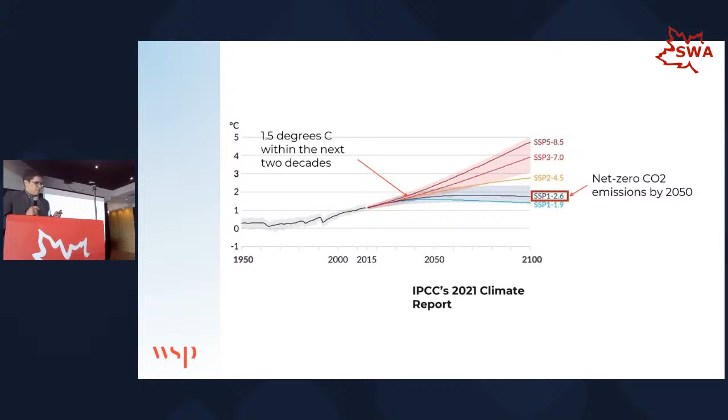So those are global average temperatures. Canada happens to be the country that will experience the most amount of temperature increase in the world. We've already seen a 1.7 degree increase since 1950, and as you get further north, the temperature increase will be even more severe.

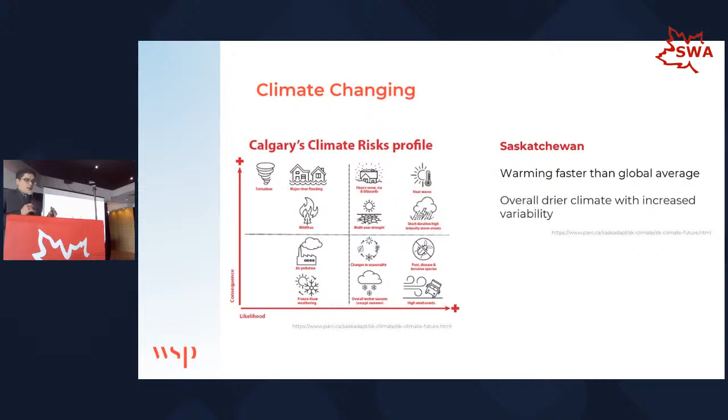So what that means for our buildings is the risks for extreme weather events are increasing. In Calgary, they refer to it as climate change hazards, including more intense storms, risks for flooding, and extended heat waves with higher temperatures. In Saskatchewan, we're expecting drier climates and more variability. This is happening all over the country. In Toronto it's a similar story: the number of days where temperature will be above 30 degrees is expected to triple by the 2040s, with longer and more frequent heat waves and more intense storms.

So what can we do about it? It's not all just doom and gloom. There's a big opportunity for us to really change the course. For us working in the building industry, we have a big opportunity here because over a quarter of the carbon emissions in Canada come from buildings. In the GTA, buildings are actually the largest source of carbon emissions because of the energy it takes to operate them and the carbon involved in their construction.

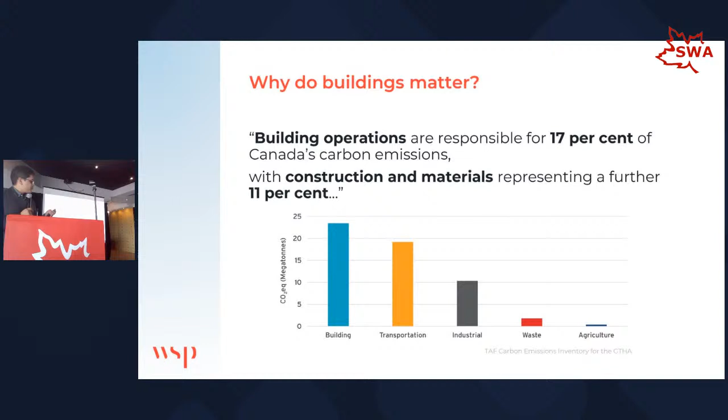So now let's talk about how our building codes and legislation are trying to address the issue.

So for new developments, it's fairly straightforward, right? Energy codes are becoming more and more stringent, demanding buildings that are more airtight, better insulated, and with mechanical systems that are powered by electricity instead of burning fossil fuels. As you know, in Toronto, we have the Toronto Green Standard that has different tiers requiring better energy efficiency as you go from tier 1 to tier 4. And the goal is that by 2030, we are building buildings that are net zero ready.

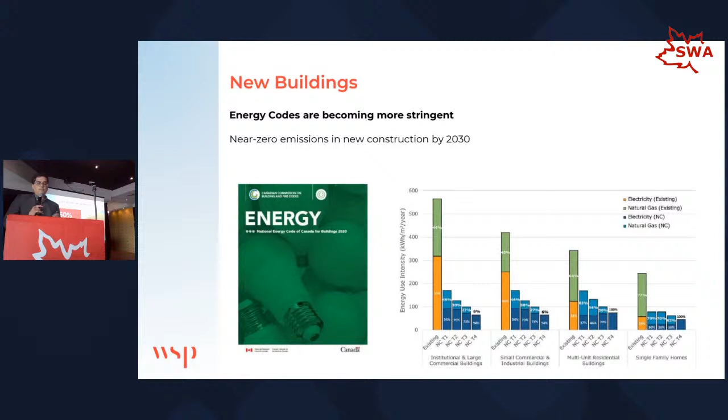But the problem is we can't just focus on new construction, because most of the buildings that will be around in 2050 have already been built. And many of them without any energy requirements at all. So that means that even starting today, even if every new development is built to net zero standards, we still won't be able to reach our carbon reduction goals. We really need to focus on improving our existing building stock.

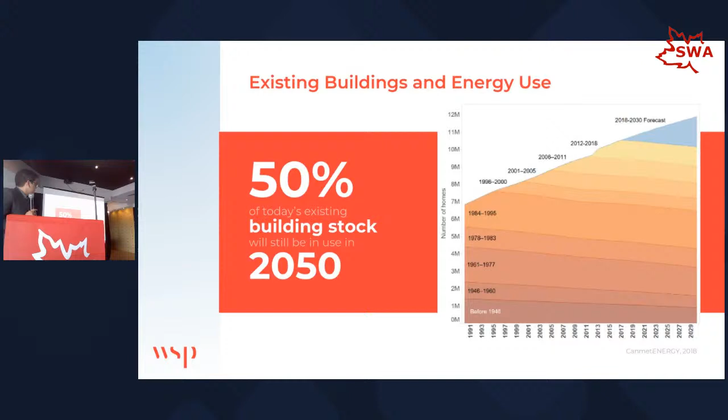So the federal government has recognized this and has committed to some key measures: setting a price on carbon that will increase over time, updating the National Energy Code to net zero standards to be in place by 2030, and creating an existing building model code that will include emission targets. I'll get back to this in a minute.

But the government realizes that this will require a massive amount of investment into our buildings. And so they've developed different funding opportunities for these deep energy retrofit projects.

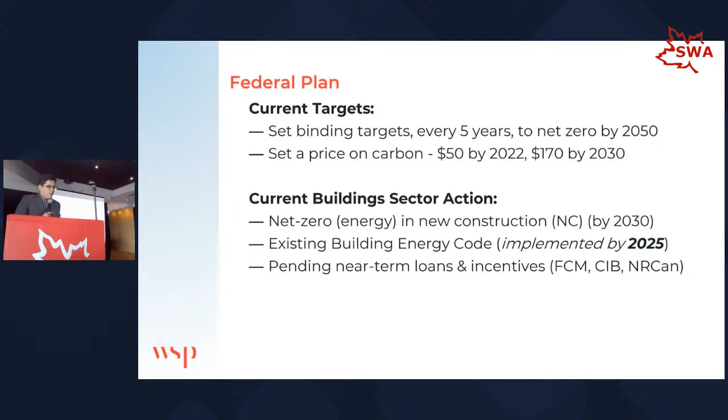In Toronto last year, the city committed to energy policies for existing buildings as well, requiring energy reporting and benchmarking our current building stock, requiring audits and recommissioning of our existing mechanical systems, and also establishing mandatory emission targets by 2025 for existing buildings.

So this is coming, and we need to start thinking about how we will retrofit all these existing buildings that are very inefficient.

This is in line with other municipalities across North America. In 2019, New York City passed Local Law 97 to start limiting carbon emissions from existing buildings. And in Vancouver, WSP has been helping the municipal government determine limits on greenhouse gas emissions for existing buildings that will be implemented in 2030. This, of course, will create a massive retrofit market and a great opportunity for anyone looking to improve the efficiency of our existing buildings.

So we have seen why changes are needed and what is being done at the policy and building code level. Now let's look at what actually needs to be done at the building level and what kind of projects we can look forward to.

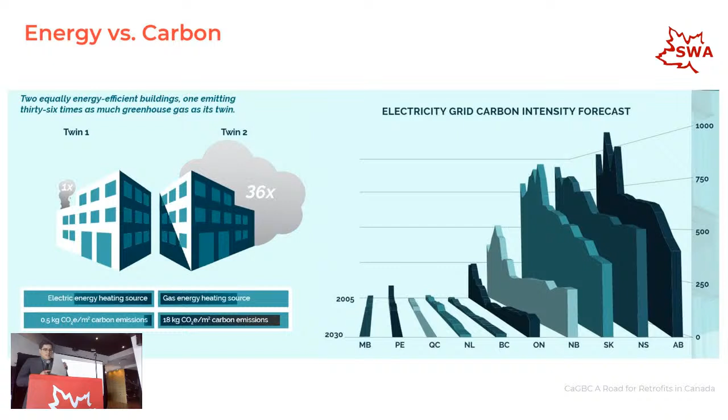So when we talk about low carbon design, we need to consider more than just the carbon required to operate the building, what's called operational carbon. We also need to consider the carbon that it took for the building to be constructed in the first place, what's called embodied carbon. So that's why maintaining or retrofitting an existing building, even though it may not be the most energy efficient building, is much better from a carbon perspective compared to knocking it down and building a net zero building, for example.

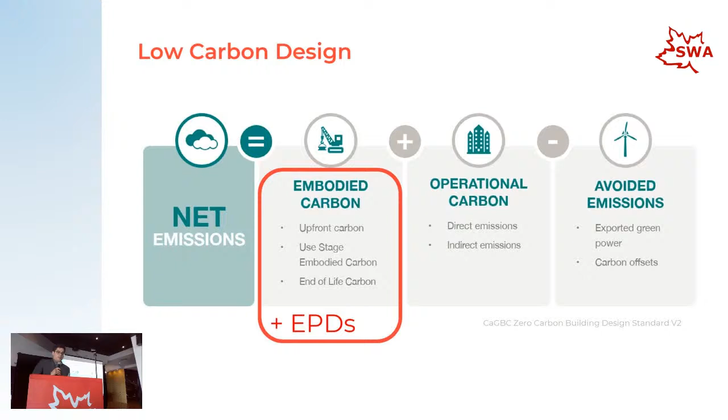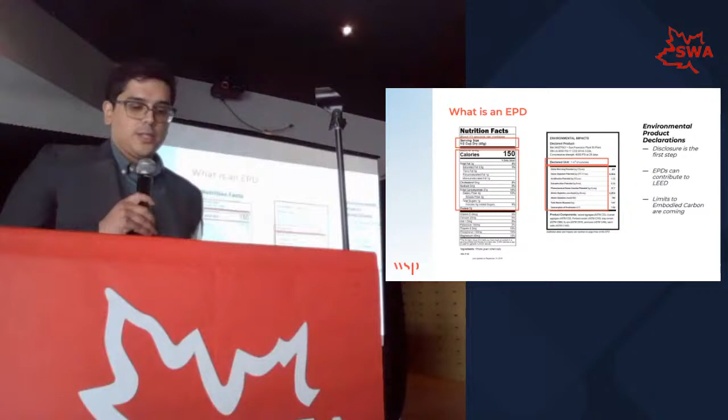This is where those of you who are manufacturers, or work for manufacturers, will be directly involved by the use of EPDs, environmental product declarations. EPDs are like the nutritional facts you find on any food product. They tell you the environmental impact that a certain product or material will have from a life cycle perspective.

If your company hasn't done these before, be aware that the requirements are coming. At first there won't be specific product requirements for EPDs, only requirements for disclosure of environmental impact. Programs like LEED version 4 already provide LEED points for EPDs.

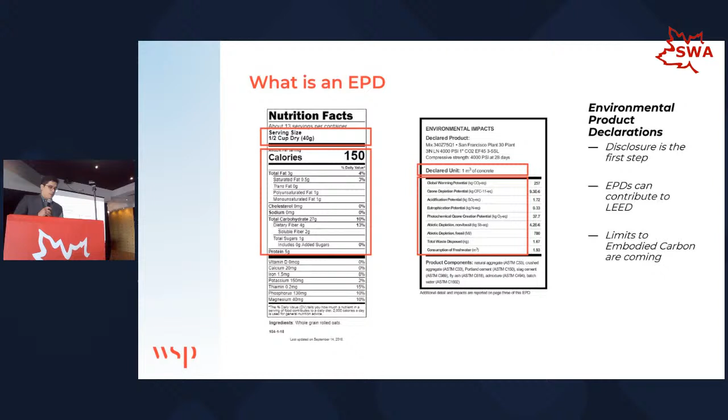But if we start considering more energy efficient retrofits, we can actually regain a lot of those carbon emissions that were expected to continue. This is the idea of reinvesting embodied carbon and having returns in terms of carbon savings down the line.

Going further, if we look at deep energy retrofits that include on-site renewable sources, we can perhaps provide electricity back to the grid, and in the end, at the end of the life cycle of the building, you might have negative carbon emissions.

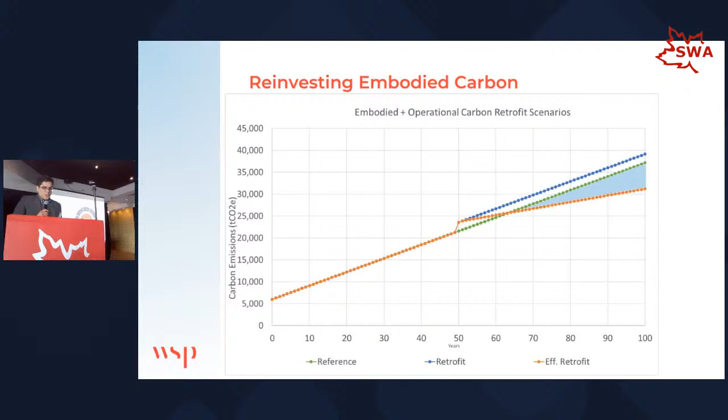Looking at the life cycle of the building, we can try to identify when these retrofit projects are supposed to occur, because typically as problems arise, building owners will be restoring or renewing their enclosure and facade components in response to complaints from occupants, leaks, cracks, or other safety issues.

But we need to step back and look at the bigger picture. What is a more efficient and effective way to maintain your building enclosure while meeting the overall needs of the building, including those for energy performance?

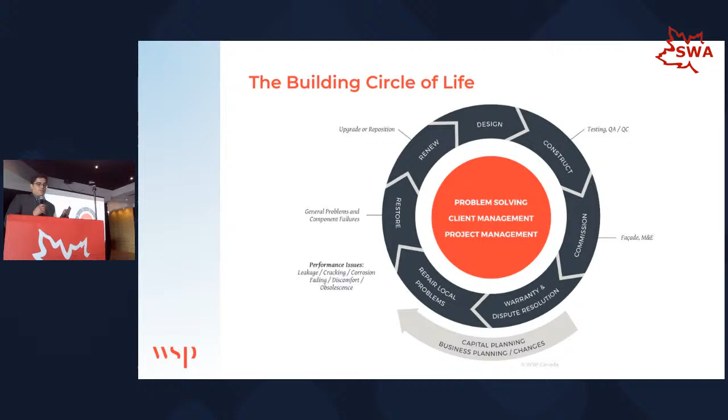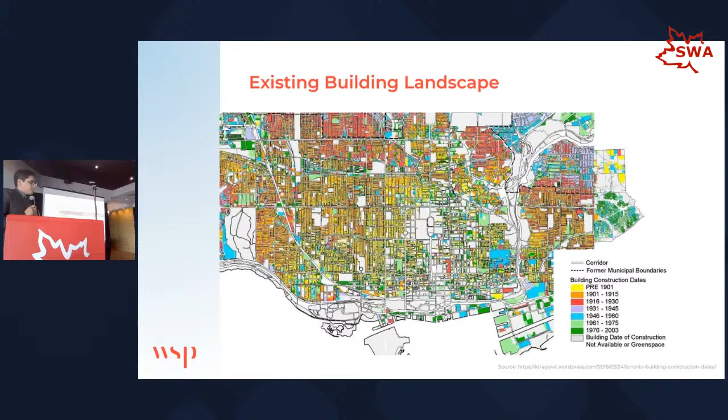According to Natural Resources Canada, over a third of commercial and institutional buildings were also built in the 70s and 80s. So today, most of these buildings are between 30 and 50 years old, or older.

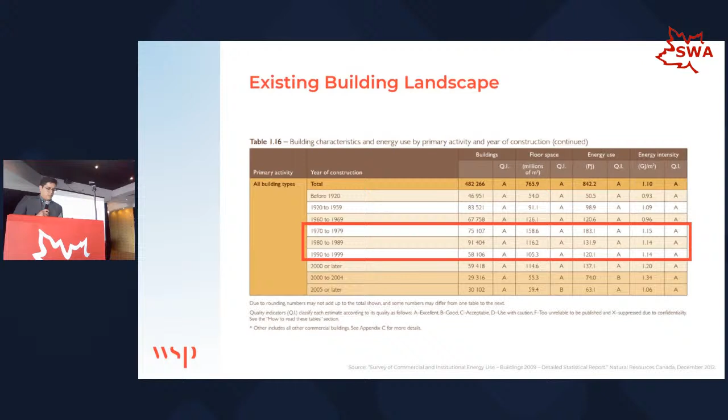Buildings can sort of limp along with old HVAC systems for a long time, and similarly IGUs can last for a long time as well. Sealants, well, they're typically considered maintenance if you're not doing a proper sealant replacement job. But a lot of these buildings have already had a holistic retrofit opportunity that we've missed.

The next best window is actually today. Within the next 5 to 10 years, most building owners that own these buildings should consider holistic approaches to renew their building systems in an efficient and effective way as these systems start to age and terminate their service life.

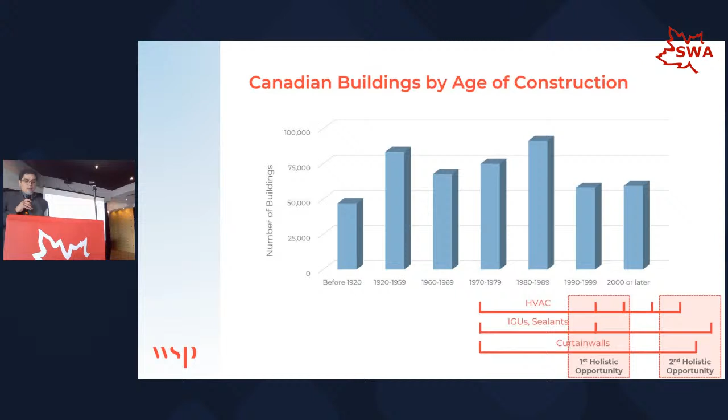Going back to how these buildings will be decarbonized and approach net zero, the key priorities are to reduce loads by having high performance enclosures, improving the energy efficiency of M&E systems, and fuel switching and strategic use of renewables is also important. But every building is different.

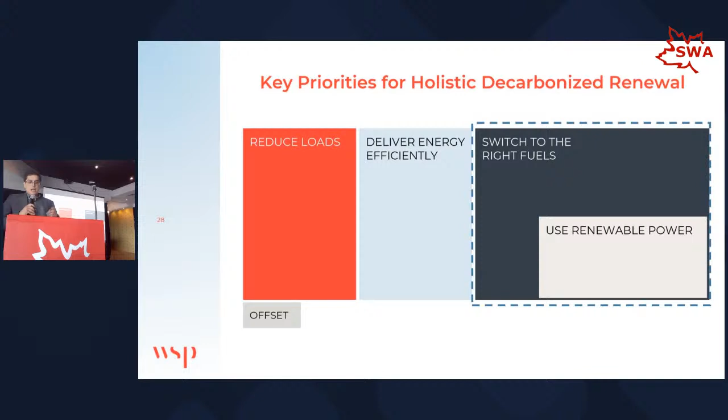There are many ways we can reach net zero, some will focus more on enclosure retrofits, others will focus more on the retrofit of mechanical systems and fuel switching. It will all depend on where the building is in its life cycle, the types of mechanical systems used, and how the enclosure can be retrofitted.

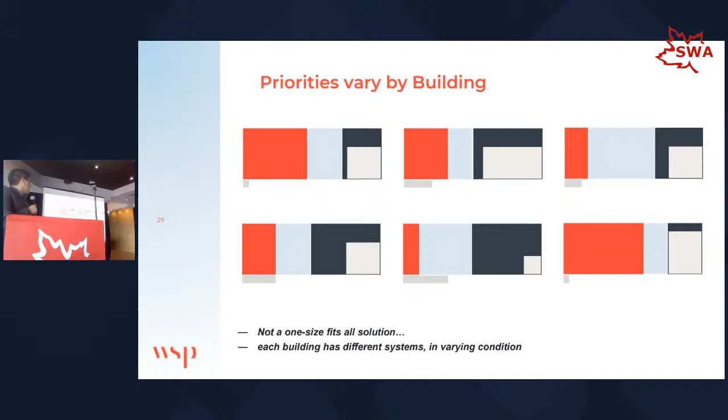The building enclosure controls, in large part, the energy loads of the building. It directly affects the indoor environment and comfort of occupants, and it's critical for the resilience of our buildings to adapt to changing environmental loads from climate change. Because of this, we recommend starting with the building enclosure when owners consider deep energy retrofits.

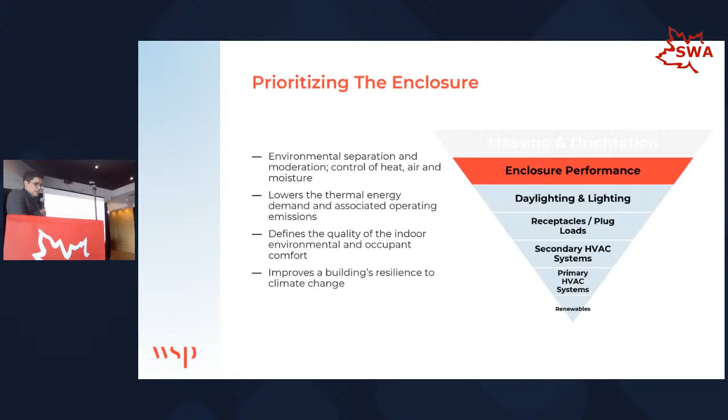So let's look at retrofits in a bit more detail now. I want to quickly go through some building envelope fundamentals so that we're on the same page, because these will be critical to understanding the energy conservation measures that Jason will be speaking about.

So what is the building enclosure? It's the environmental separator for the building. It delineates what the indoor environment and what the outdoor environment is. And for this reason, it needs to control for the environmental loads imposed on the building from wind, precipitation, temperature differences, solar radiation, and so on.

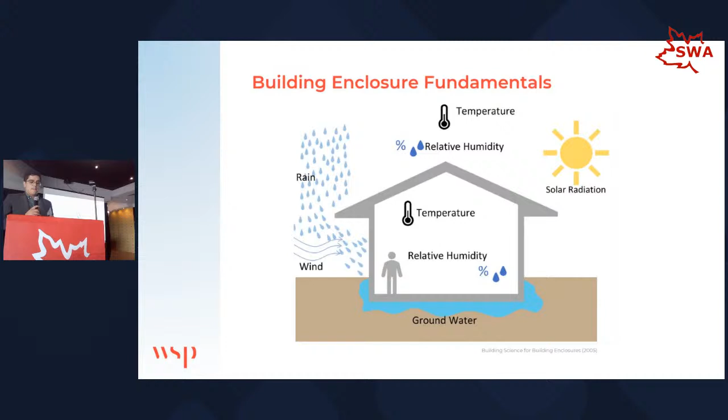And it does this through four main control functions. The building enclosure includes thermal insulation, air barriers, water-resistant barriers, and vapor retarders. And all these have some impact on the energy performance of our buildings.

But when we talk about reducing energy losses, we tend to focus on continuous insulation, reducing thermal bridging, having higher performance windows, window glazing that can protect against solar radiation or benefit from free solar heating, and airtight enclosures as well. So I will pass it off now to Jason, who will speak in more detail about building enclosure retrofits.

All right, thanks, Christian. So the next following slides, I'm going to explore some energy conservation measures, ECM for short, some of the things that we're going to be designing and specifying, some of the things that you're going to be seeing moving on in the near future.

Some examples that I'm going to be providing to you today are a snapshot of different building examples from different building typologies, heights, occupancies, and so forth. I tried to get a little taste of everything across the country. Of course, every region does have its own specificity with its own climate design. So I want to share some ideas of what you guys can expect and the opportunities that can be seen from an energy and carbon perspective.

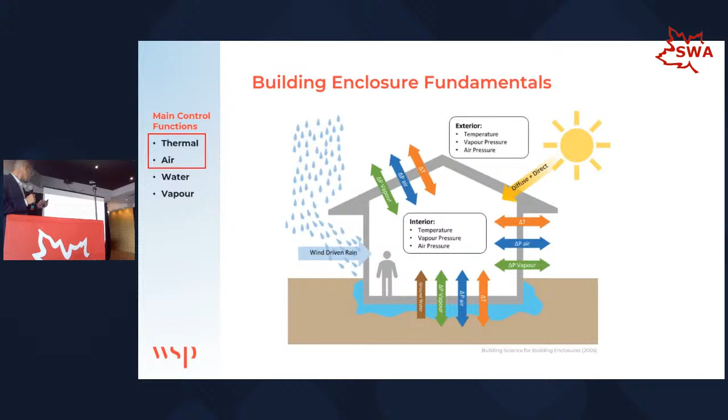So just a summary of what we talked about: walls, roofs, and windows. First one here is an ECM for overcladding existing walls. This is the most straightforward envelope retrofit strategy, simply by recladding it with additional materials to make the building have better performance.

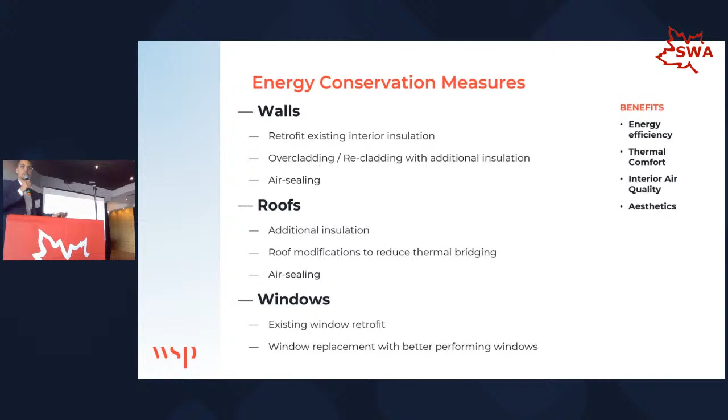And the building that could have been insulated, this existing building was not, but if it was insulated with insulation within the cavity, these thermal bridging effects would have degraded the entire system between 40 to 70%. And you don't get this with an overclad system. So this is a tremendous benefit of doing that because we're addressing a lot of these past deficiencies in these projects and these sources of energy loss.

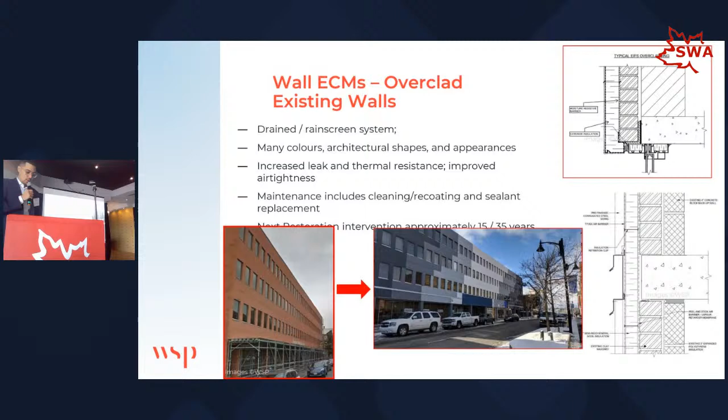So here's another example: instead of an overclad, let's just replace the entire cladding system. This is for a tall residential building, a few stories high, where we decided to completely replace the cladding with new. Again, we're putting the peel-stick membrane, putting in a few inches of insulation, semi-rigid, supported by Z-girts, and then finished off with the metal cladding system.

And in these applications, you can also consider doing an interior retrofit as well, meaning insulating from the inside. There are obviously challenges with that from a condensation perspective, but you can consider doing that if the building is trying to maintain its existing appearance, such as a heritage building, or if you have constraints on site, such as tight setbacks with a lot of towers we have downtown.

But there are benefits to doing overcladding as well. We're minimizing the disruptions to the building occupants, so construction can happen while these people are still living in the building. We are addressing the thermal bridging, and we're increasing the performance from a water management perspective and also a heat loss perspective.

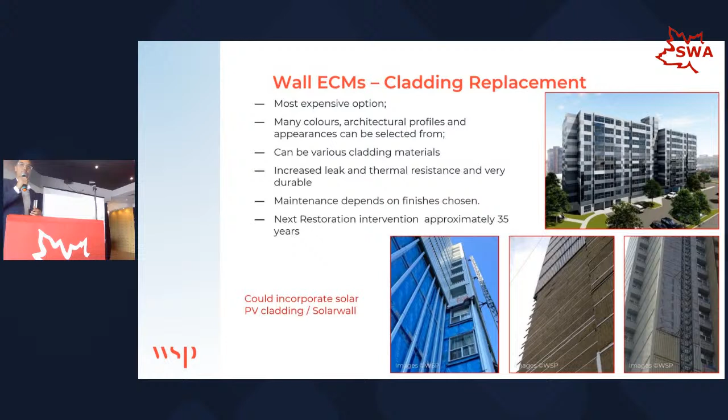By overcladding, we are saving the existing materials. To Christian's point, from an embodied carbon perspective, we have already invested in these materials. By keeping them there and using them as structure, we're using less material, less carbon, which is better for the planet.

The next ECM is for roofs, and this is simply adding more insulation to beef up the R value of roofs. This can be tied in with any roofing project. When the membrane is no longer in good service and the roof needs to be replaced, there's an opportunity to put in more insulation, which can address thermal bridging, especially with older roofs that only have one layer of insulation.

The joints between the insulation boards is a big source of thermal bridging. We can also address thermal bridging at the parapets, where in a lot of old buildings the insulation does not wrap around. By increasing insulation levels on the roof and around the parapets, tying up the wall assembly, we're decreasing the amount of thermal bridging at the building.

But there are challenges to doing this. It's not simply just putting in insulation. There are things we need to consider, because as we add more insulation, we'll be modifying any solar panels or HVAC equipment on the roof. Parapet heights will most likely change, and especially short ones might have to be rebuilt. If you have stairs or terrace doors exiting onto the roof, the design may have to change to accommodate that insulation.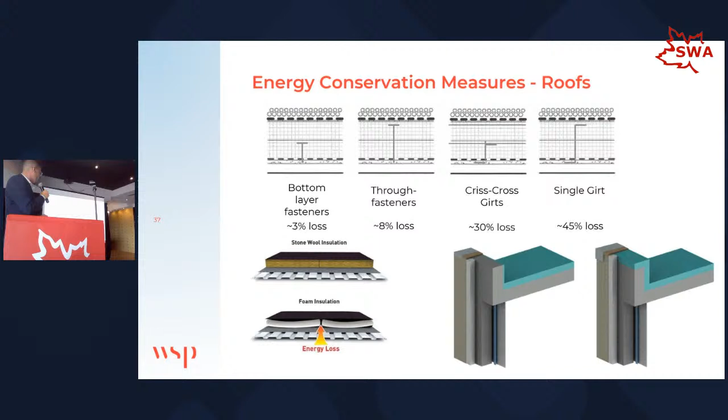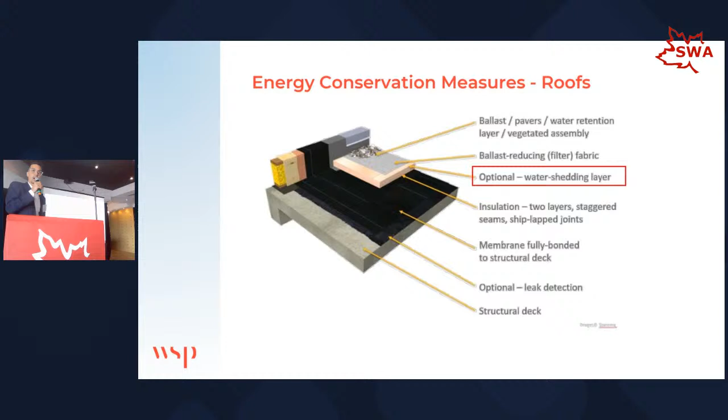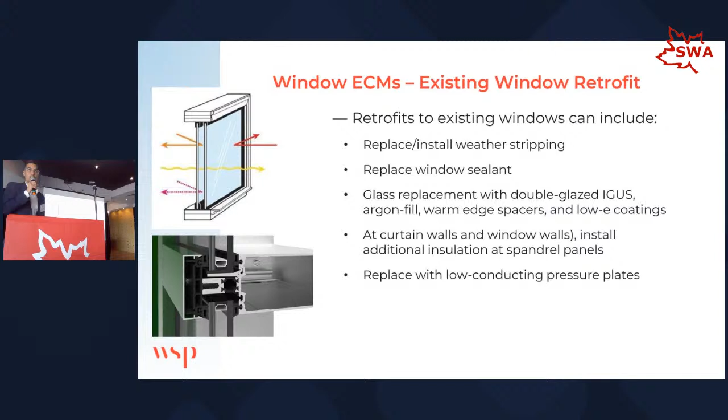There are much larger interventions as well. If budget permits, you may consider completely replacing the frames with something better performing. If your building has aluminum frames, which are terrible for performance, you may consider fiberglass frames, or aluminum frames with a thermal break to help with performance. This also gives you the opportunity to position the window so it aligns with the wall insulation, which helps mitigate thermal bridging when doing these large scale interventions.

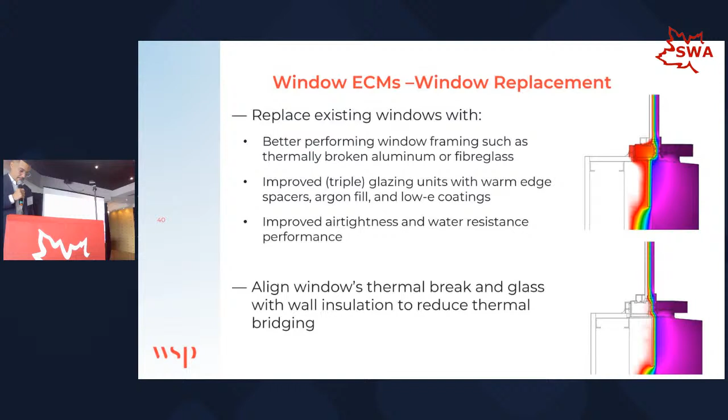If you're combining this ECM with a potential overclad project, there's an opportunity to decrease the size of the window, because windows are not that great performing. By decreasing the amount of vision area and increasing the opaque area, you're also increasing the overall building R value, retaining a lot more heat.

This is also an opportunity to reduce the framing elements within the window itself. I just showed you an example here of several operables in one punch opening. This happens in a few buildings, so we have the opportunity to reduce the amount of framing elements, which also improves the performance of the window.

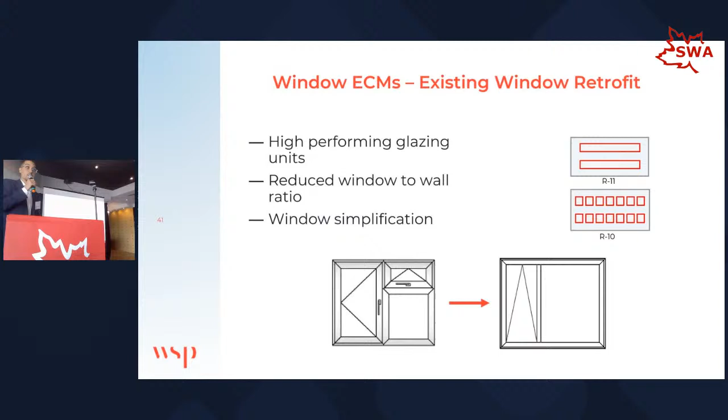When it comes to below grade, this is similar to overclad as well. Adding more insulation to the foundation walls, even if it's a building that's on grade, there's tremendous benefit to putting in insulation, especially if you're doing a waterproofing project. This is the perfect opportunity to address insulation levels. If you're already excavating and you've sealed all the cracks and applied waterproofing, why not add extra layers of insulation as well? A lot of buildings are uninsulated, so this is the preferred opportunity to do so when doing this type of intervention.

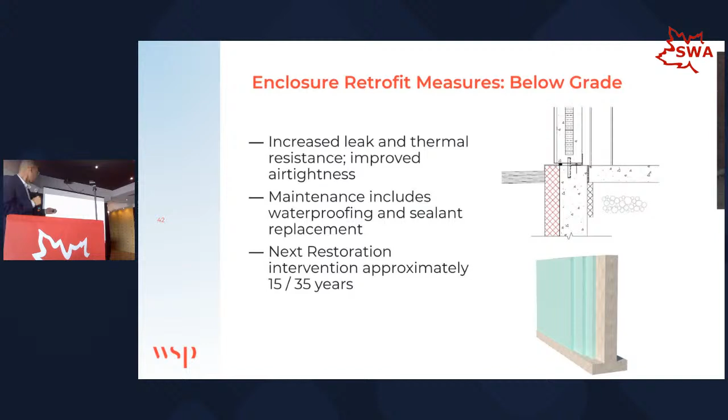So the last ECM that I want to present to you is a pretty simple one, and it's air sealing. It's not as similar as the other ones. The past ECMs were dealing more about beefing up the insulation and retaining as much heat and energy within the building as possible. Air sealing is a different beast.

It's quite common sense. Air transports a lot of energy. In your home, for example, a third of your heat loss is mostly attributed to air leakage if you live in an old home like mine in Toronto.

So by addressing, starting off with large penetrations, your mechanical systems have been abandoned. I've been on numerous sites where we have so many curbs and openings that are just literally there, capped in sheet flashing, not really sealed. This is a perfect opportunity, as part of your reroofing work as well, to seal off these openings. It's the greatest source of air leakage.

And once those are addressed, moving on to the smaller openings. I'm showing an example here. Pretty common, this is a precast building. It's a big box Home Depot type store where the sealant is the primary barrier between the joints of the precast. Having this type of breach here is introducing a lot of energy movement between the inside and the outside of the building.

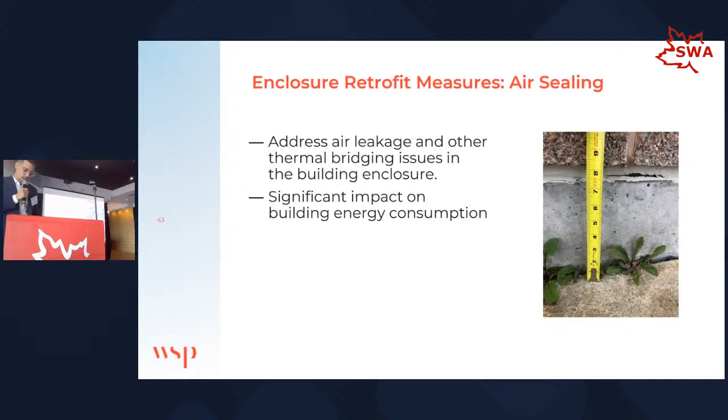So, getting into some of the detailing here and tying into the ECMs, the ECMs can only work if it's constructed well, and this resorts to the contractors we have here on site. Quality control is a huge thing when it comes to implementing these ECMs.

In many cases, when we are designing these energy conservation measures, we are not using traditional detailing. So we need to think outside the box on how we execute these types of work and have an understanding of the types of designs and details and materials that are going into place.

So I put here, in facade systems, we have so many different details, like thermal breaks and how it connects to one system and how the membrane ties in and how the seal is terminating and so forth. It makes a huge difference from an overall perspective from thermal, but also water as well. So the fundamentals are, as a collective, understanding the limitations of the materials that we're using on site in terms of compatibility, weather applications such as cold weather, self-sealing, and long-term durability.

And I put here, pre-construction meetings are essential. Introducing your team to the reality of the details and some of the targets that we're trying to meet in terms of air tightness as well, at the start of construction, has a huge impact because this gives you the opportunity to clarify questions on the air barrier assembly. How does it tie in? What materials am I using? How does it cure? What is it compatible with?

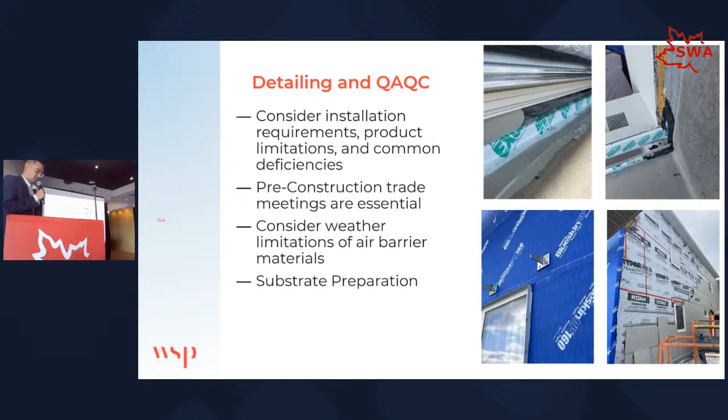Common deficiencies that we see on site - this is something I deal with on a daily basis. Seals at penetrations do not exist or fully apply.

Membrane is wrinkled or tented, so this gives an opportunity for water to penetrate the system and also air leakage as well. Transitions between different types of building assemblies is always a big one here, especially when it comes to roofs to walls or walls to below grade assemblies.

Often the transition might be missing. There could be incompatible materials in contact with one another, which is a huge no-no. These materials are not designed to be together. The system will deteriorate or it may not even adhere to the surface.

And also along window perimeters, I've seen multiple times reverse shingling, allowing water to kind of get in behind, or it's not sequenced in a way where water can shed properly.

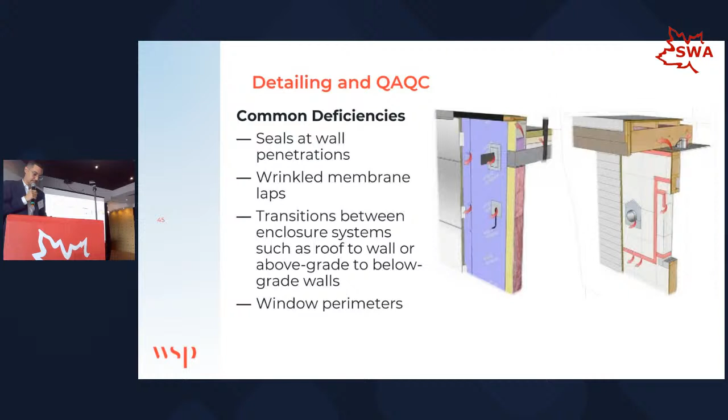So one way of minimizing these deficiencies on site is really constructing mock-ups, and this is the primary opportunity for not only consultants and owners, but also contractors to confirm that the performance of the wall that's being constructed or any other assembly is adequate.

Design intent has been satisfied, and this gives an opportunity for contractors as well to identify potential problems within the system from a constructability or coordination issue, and it might require multiple iterations to get this done right.

And it's better to figure this out at the beginning of the project rather than at the end when we're doing a final walkthrough, because a lot of these issues that are not resolved at this stage could be full scale, and that can result in thousands of dollars, if not redoing a lot of the work that's on site.

If possible, the mock-up should be constructed to allow for qualitative testing, such as water or air testing, that help identify any breaches in the membrane. And they should also include challenging interfaces and components to verify the sequencing, the installation, and the methods that are critical to the function of the air barrier and water barrier.

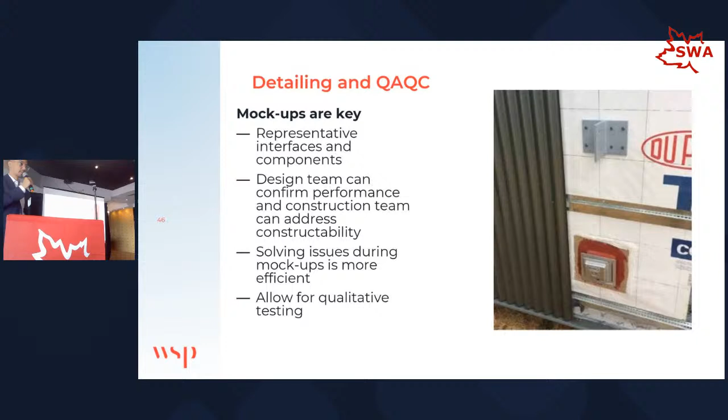So some of that testing that we could do at the mock-up stage or even at the end of the project, I've listed some here. Right now the code is quite gray in terms of what the requirements are for existing buildings, but for new buildings, the NBC has introduced whole building air tightness testing.

So at the end of the project, you'd be using a blower door fan to pressurize the whole building just to see how tight the building is.

But in terms of small scale testing that we do to make sure that localized deficiencies are addressed or do not exist, we're using smoke or bubble test methods. You can see here in the image that type of device being used. That's typically employed on penetrations where the deficiencies are not visible to the eye, and by doing this type of test, you can see bubbles that start to appear, indicating that there is some sort of air leakage. So this type of testing is beneficial for everyone on the construction site.

You can also be doing a pressurized test as well at certain locations of buildings, such as your windows or walls, just to make sure that the air tightness levels are being met.

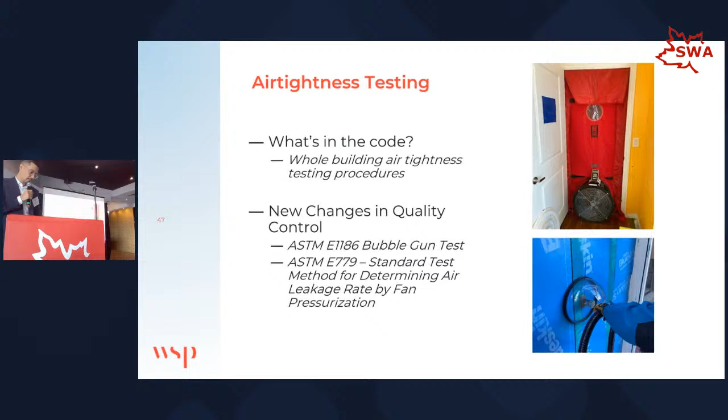So one of the questions we might be asking is, what is the sweet spot in terms of targets? What are we looking for in terms of owners and building designers and so forth? There is no answer for that. Every building is unique. Every building has its own challenges and opportunities, and there are no silver bullets of which retrofit strategy is the best or should be employed.

So I'm showing you a graph that I took from a project that I'm working on for a hospital, showing varying degrees of different types of retrofits that we can be doing, from increasing the overall wall R value, the roof R value, window to wall ratio, and even solar heat gain coefficient. You can see kind of where the line guides up to how much energy is being used. And this is almost a scaling effect.

So you might consider increasing the wall insulation levels to a higher level, but that may decrease the amount of roof insulation you may need, and so forth for windows and so forth. So there are no really silver bullets here. It's all about good design and good practice.

But literature has provided some insight of what the target should be if you're trying to achieve net zero, and I've just shown some here.

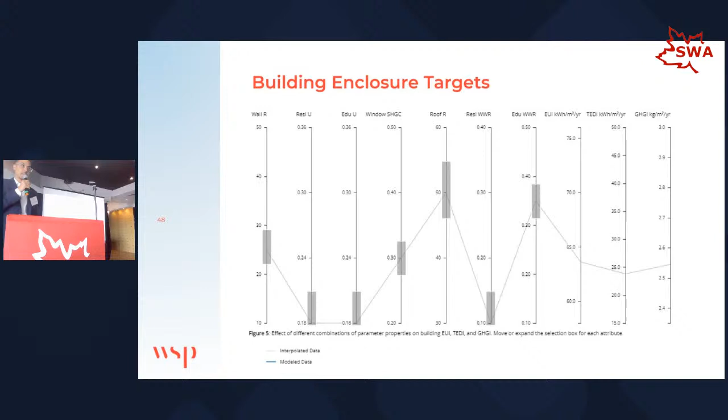This again may vary depending on the type of building, but for ceilings and roofs, we're looking for R50 to R60. That's more or less 11 inches of polyiso insulation. That's a very thick roof.

For above grade walls, we're looking at R30 to R40. That's 9 inches of semi-rigid insulation, more or less. Windows are R6 or higher, and that's usually achieved through triple glazing. For below grade walls, we're looking for R20, foundation slab R10 to R20. And for air tightness levels, quite rigorous, we're looking for 1 air change per hour at 50 pascals.

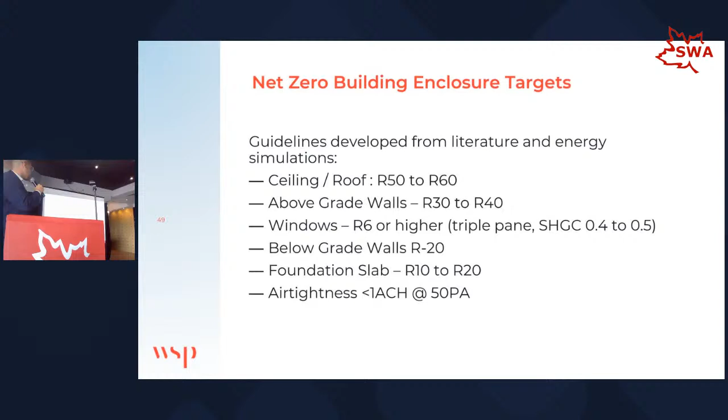So just to recap so far of what we discussed, there are no silver bullets. We're relying on really good design to figure out what is the best way of tackling these buildings. Major enclosure upgrades happen every 20 years, as Christian said. We've already missed that first opportunity a few years ago. We are now reaching that sweet spot where major interventions are required, and there's an opportunity to upgrade your building.

Another point I have here is setting minimum targets - setting minimum air tightness targets, R-value assembly targets, and so forth, so that there's a clear objective of what should be met for the overall building. And this can be aligned with incentives. There are plenty of incentives that the municipality of Toronto and Vancouver and so forth offer, including federal ones, to help incentivize doing these types of retrofits.

And depending on the type of building, that might be more cookie cutter, prioritizing the portfolio as a whole or a neighborhood together.

This is all an iterative process. So there's a lot of thinking that goes involved into this. And we require everyone at the table to come and brainstorm ideas, from contractors to architects and owners. It's important that we all come together as a team to figure out what would be the best solution for your type of building.

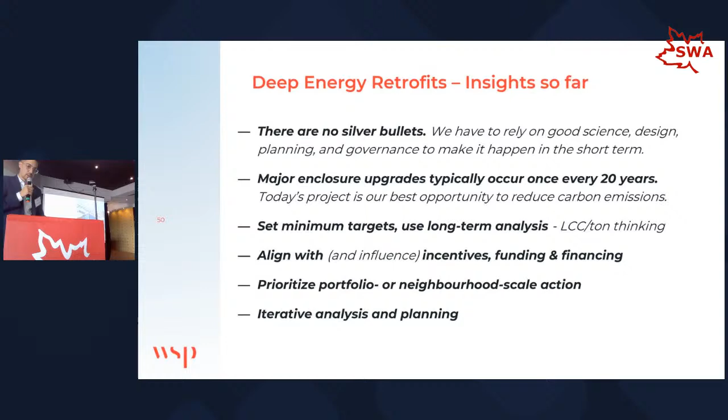So I want to get to a few case studies. The first one I'm showing you here is the OAA headquarters. It's a complete net zero retrofit. It was at a budget of $8.5 million, and it was completed in 2019.

The OAA headquarters was initially constructed in 1989 to the R2000 standard, which was the high benchmark of its day. 25 years later, the OAA was facing a lot of maintenance issues - a lot of components were degraded, and they needed a lot of repairs to keep the building up in place. They also ran out of space, so they were looking to either potentially relocate into a new location or fix what they have on site now.

So the OAA worked with consultants for over 3 years to research what would be the best solution to reach net zero targets, meaning eliminating the use of fossil fuels and electrifying as much as possible. They've achieved this through a variety of different ways - mostly through a geothermal system that was installed, solar panels on the site providing renewable energy, and of course a high performance enclosure.

So just giving a brief overview of what that building looks like - I've shown you a floor plan of some of the programming that's in the space, a lot of offices, conference rooms, terraces, and so forth. It's 22,000 square feet, and the building is 3 stories high. Something interesting about this building is it doesn't sit on the grade, it's actually elevated, which means there's a lot of soffit area.

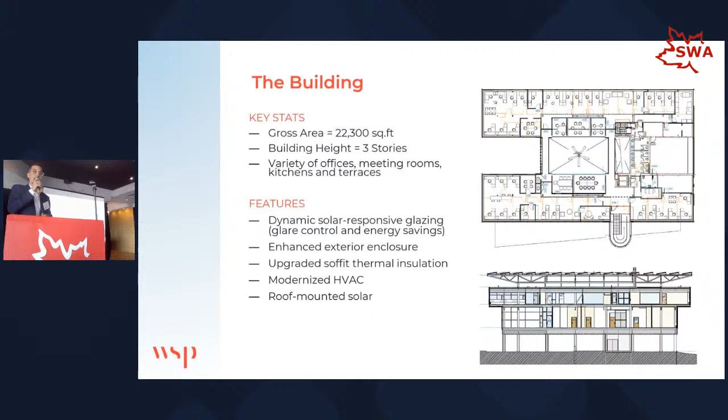So getting into a little bit of the details here, the existing system had an R10. It was a modest amount of insulation that was in aluminum panels, but one of the first things we did is that we actually replaced the Z-girts that was supporting the system. These Z-girts can degrade the system up to 50 to 60%. So changing the Z-girts to a high-performing clip, such as fiberglass or stainless steel, has already done a tremendous amount of benefit in improving the overall R value.

In addition to that, we also applied spray foam in the walls to help with air in the building and also bump up the R value. Air tightness improvements were made through the use of liquid applied membrane to seal cracks in the wall and in the concrete and in the soffits, to make sure the air barrier continuity was there in the transitions, especially at the windows.

And in terms of the windows, we've also installed new triple glaze for the majority of the building. These were fiberglass frames, whereas the original were aluminum, so that was a huge win. And the existing curtain wall that was kept in place was retrofitted with fiberglass pressure plates as well.

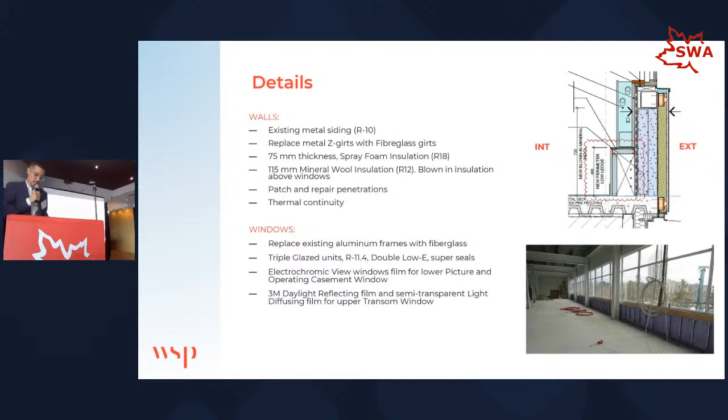So when it came to the soffit, again, the soffit was a large area since this building is elevated, so this was one of the key areas we wanted to tackle.

A lot of the mechanical systems were removed as part of the HVAC switching with the geothermal system. So a lot of the penetrations were sealed. We made sure that the air continuity was in place, and we also added a fair amount of insulation to bump up the R values.

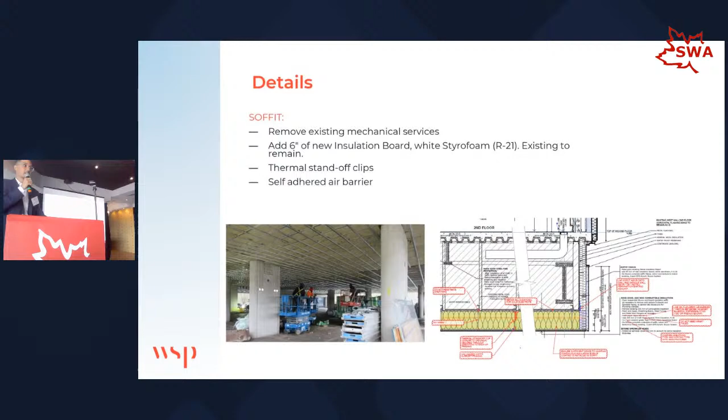The soffit insulation clips were also changed to a higher-performing one to increase the overall performance of the building. During this process, we also did a lot of air testing throughout construction as quality control.

Again, a lot of deficiencies can't be seen with the naked eye, especially when it comes to membranes, so we've used air tightness testing at multiple phases of the project. You can see here at several times in the building we did come across some levels where heat was escaping. Through this process we've managed to identify deficiencies early on and address them right away before the cladding was finalized.

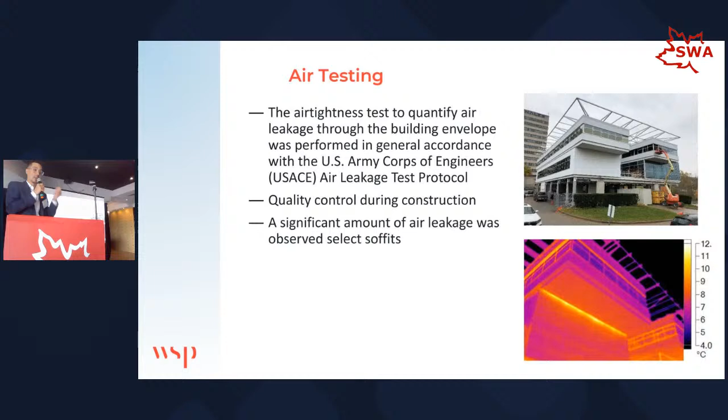Getting to more core Toronto, 77 Bloor Street is an interesting example where the retrofit strategy focused more on the HVAC and commissioning. As a result of switching the systems, the building owner was able to get new occupiable floor space, because the equipment previously in this building was no longer required. Through efficiencies they managed to gain this floor space. You can imagine the incentive for this owner to do these types of retrofits—they managed to get new floor space, more tenants, which means more revenue to pay off the retrofit.

No significant changes to the building envelope, but we did replace the windows. I just want to show this example that the building envelope is important, but there are different ways of achieving close to net zero. This building did not achieve net zero—it could have if it decided to fuel switch, but it almost made it.

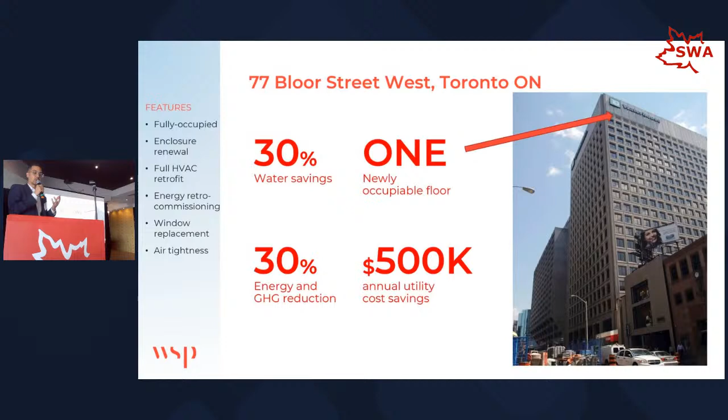Contrary to 77 Bloor, the building envelope here has been retrofitted, and you can clearly see that. There's a variety of reasons for that—the main driver was again performance, but the owners also wanted an opportunity to renew the appearance of the building. So they decided to put in high-performance glazing systems and a lot more spandrel areas. In this process they also retrofitted the HVAC system.

I just want to highlight that building envelope—I'm talking a lot about the details of waterproofing, membranes, insulation and so forth—has benefits from a thermal perspective, but also from a financing and leasing perspective. If the building looks good through these retrofits, you can attract a lot more clientele, and you're also making the building perform thermally.

So just want to end with a few more slides here, talking about the planning process and how these retrofits happen.

Planning for a holistic retrofit is all about evaluating the performance, doing an energy audit or recommissioning, doing a condition assessment of the facade to see what type of system is in place now, what can we do, and what are the deficiencies on site we need to tackle.

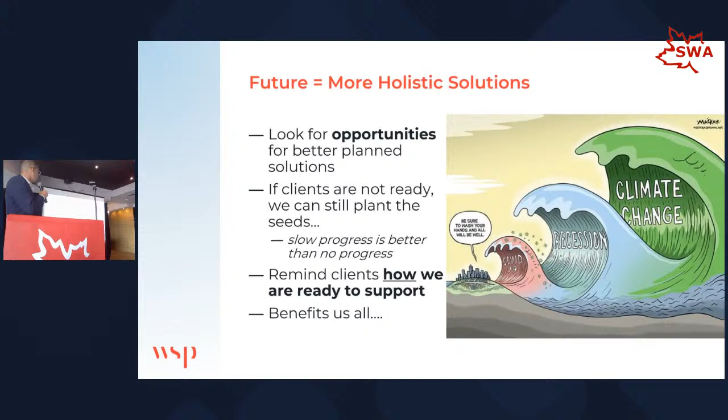As a summary, I want to go over some points again: prioritizing projects, integrating short and long-term needs—short-term repairs, but hopefully these will include deep energy retrofits. Phased projects if needed; this does not need to happen all at once, so retrofits can be implemented in phases. Understand the client's needs and goals, and then implement the projects using quality control procedures of what's specified. That's always key—when you guys come in to execute the work and make sure it's constructed well.

And then maximize opportunities. Think beyond the facade, think future ready. Think about the incentives that are available, not only from a performance perspective, but also financial as well.

Just a little bit of what we do: at WSP we do a lot more than just deep retrofits. We do a lot of facade engineering as well—repair, renewal, restoration, and so forth—and some projects we've completed recently in our portfolio here.

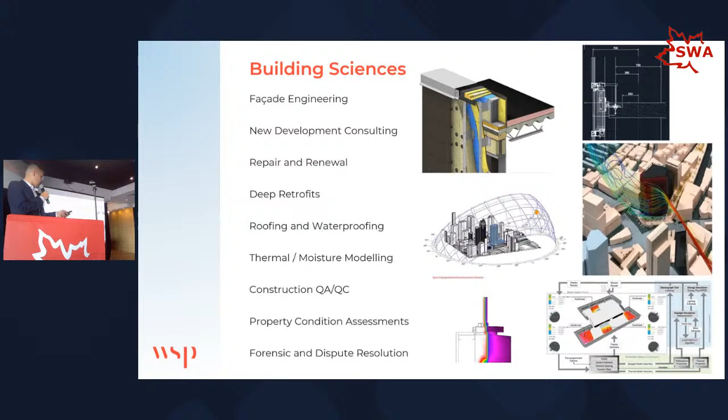So this concludes the presentation. Thank you so much for joining us today. I'll open the floor for any discussions or any questions that you guys might have.

That was a lot of them. Alright guys, there's no further questions. Thank you so much. I hope you guys are enjoying your time here, and look forward to talking to you guys at the tables here. Thanks.

Okay, thank you Jason and Christian. You certainly had a call to action. I think a lot of our members here are very proud of the work that we do in the community at large, and certainly the way you've highlighted some of the energy conservation measures and the work that we do and how it's contributing to the greater good made me feel good about the work we're doing, beyond just dealing with a project for an owner—it's actually more global, and that's exciting. So I'm also excited for our members. If deep energy retrofit is trending in such a significant way, which obviously it is, and it's mandated by code in the future, it's a business opportunity for everyone here as well, right? So that's certainly exciting. Thank you.